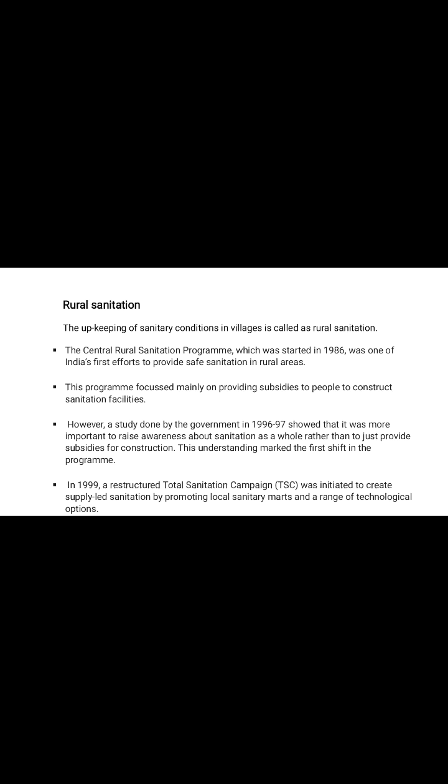In 1999, a restructured Total Sanitation Campaign was initiated to create supply-led sanitation by promoting local sanitary marts and a range of technological options.

The rural sanitation campaign has the following objectives: accelerate sanitation coverage in rural areas, and generate a push from people to get facilities rather than expecting the government to do it, as per demand-led promotion.

Also focus on intensive education and awareness campaigns to ensure that people understand the need for safe sanitation. Also, take the scheme beyond rural households to rural schools and nursery schools.

Emphasis was also placed on promoting good hygiene practices, as well as promoting cost-effective and appropriate technologies, to improve the health and quality of life in rural areas. These are the objectives of the rural sanitation campaign.

The last modification of the scheme happened in 2012. It was restructured and renamed the Nirmal Bharat Abhiyan, with an intent to transform India into a Nirmal Bharat. The scheme's revised target for reaching total sanitation was changed from 2012 to 2022, to accelerate efforts to achieve universal sanitation coverage and put focus on sanitation.

The Prime Minister of India launched the Swachh Bharat Mission on 2nd October 2014. Under the mission, all villages, Gram Panchayats, districts, states, and union territories in India declared themselves open defecation free by 2nd October 2019, on the occasion of the 150th birth anniversary of Mahatma Gandhi, by constructing around 100 million toilets in rural India.

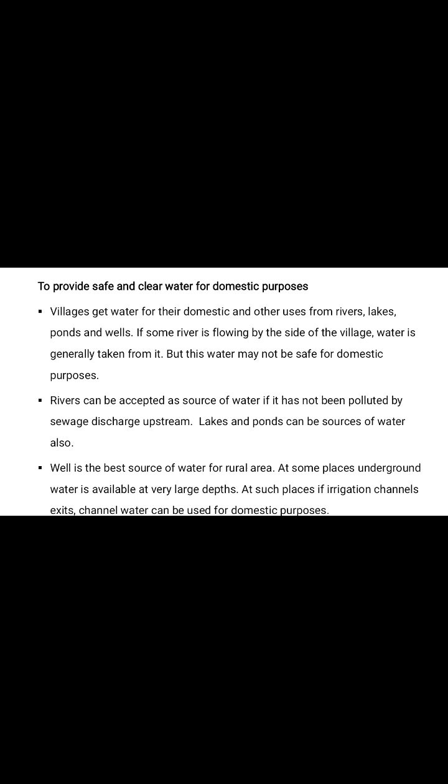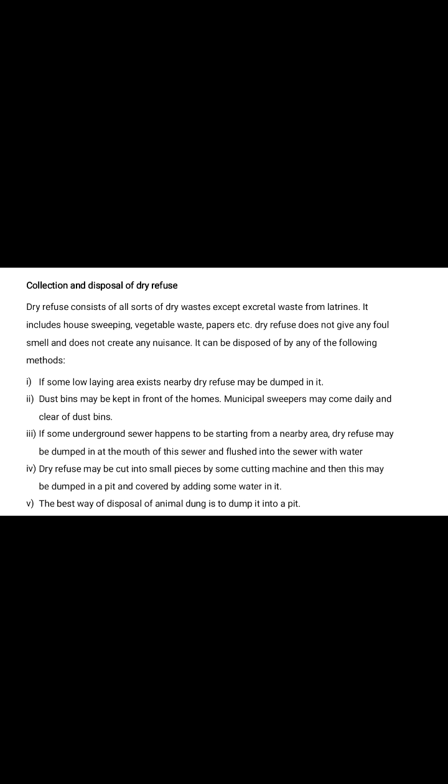The best way of disposal of animal dung is to dump it into a pit. Then third,

A head in rural sanitation is collection and disposal of wastewater. The wastewater consists of used water from bathrooms, kitchens, house washing, washing of clothes, etc. Disposal of such waste may be carried out by any of the following methods.

First, in villages, this wastewater is drained out of homes and may be used to water the trees. Second, in villages, the wastewater drain may be connected with pits in which animal dung and dry refuse is being dumped.

Also, in small towns, surface drains may be made along both edges of the streets, and wastewater drains from homes connected to them. In medium-sized towns, small pits are constructed in front of individual homes or in front of a group of homes.

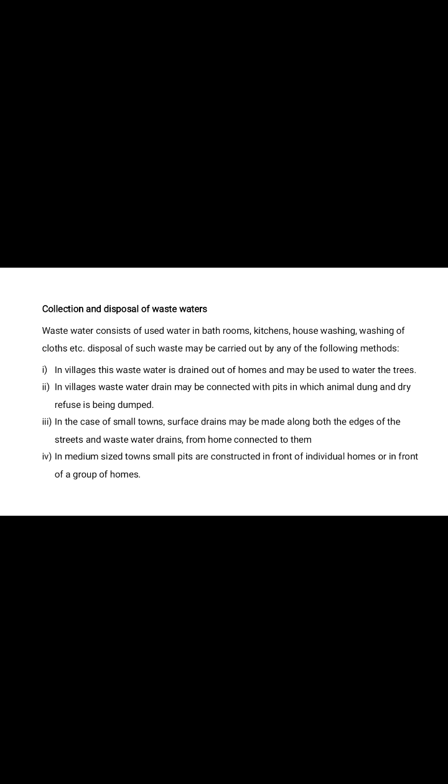The last head in rural sanitation is disposal of excretal waste. There is generally a lot of open land available around villages and small towns. People mostly go out into this open land for defecation, but still latrines are made inside homes for use of ladies and children. In small towns, it is not possible to install a proper system of sewers.

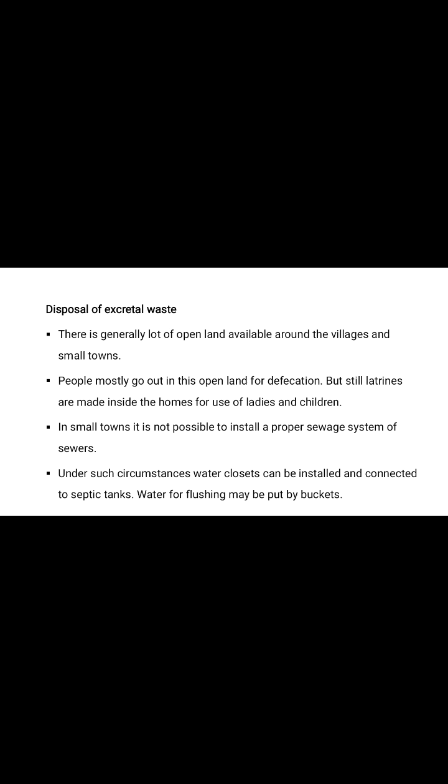Under such circumstances, water closets can be installed and connected to septic tanks. Water for flushing may be poured by buckets.

In the conservancy system, the human excreta is collected in various types of privies, such as toilets, a few of which are pit privy, borehole privy, cesspools, concrete vault privy, dug well privy, chemical toilet, removable receptacle privy, and aqua privy. These are types of privies or toilets generally used in sanitation for disposal of excretal waste.

First, let's study pit privy. This is very economical and requires no operation. The figure shows this type of improved privy in the next slide. It is essentially a pit 1.3 by 1 meter in plan and 1.5 to 2.8 meters deep.

At the top of this pit, the squatting seat is provided in a compartment. The superstructure is of temporary nature. When the pit is filled, it is closed from the top by a 60 cm thick earth layer, and a new pit is excavated by the side of it.

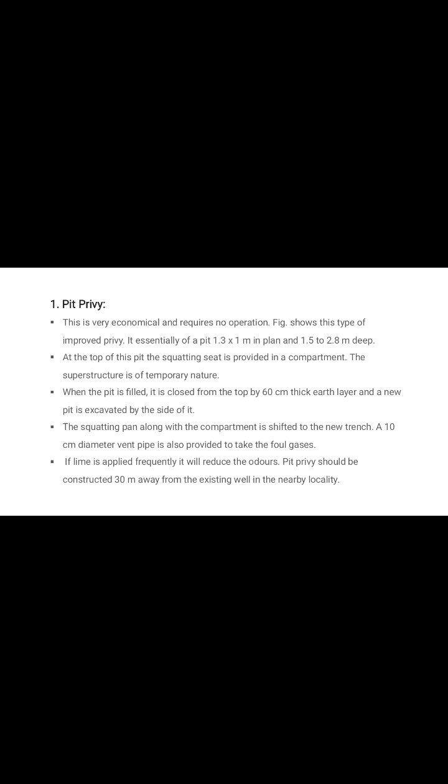The squatting pan along with the compartment is shifted to the new trench. A 10 cm diameter vent pipe is also provided to take off the foul gases. If lime is applied frequently, it will reduce the odors. A pit privy should be constructed 30 meters away from any existing well in the nearby locality.

So this is the figure of pit privy, including roof, ventilating shafts, and squatting seats. This is the sectional elevation, showing steps, doors, ventilating shafts, and sheets. And this is the plan of the pit privy.

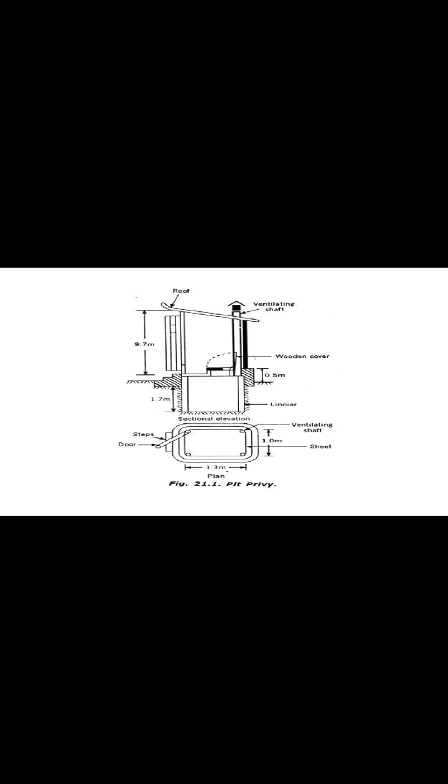Second, borehole privy. It is similar to pit privy; the only difference is in the shape of the pit. It has a long 40 cm diameter hole. The depth of the borehole should be 100 cm less than the groundwater table, so that the excreta may not pollute the groundwater.

The hole should be lined from inside. When the hole is filled up, it is covered by a thick layer of soil, and another hole is dug by the side of it.

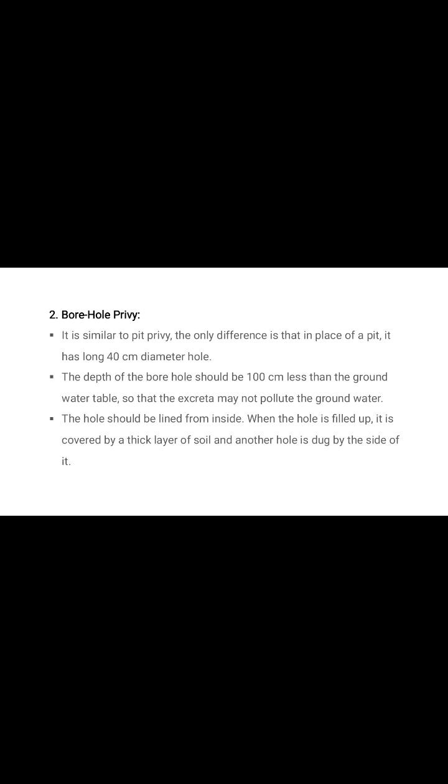The borehole latrine generally consists of a circular hole 30 to 40 cm in diameter, dug vertically into the ground to a depth of 20 feet with the help of special equipment known as an auger. The night soil undergoes purification by anaerobic digestion and is eventually converted into a harmless mass. The effort should be that the depth of the borehole should not reach underground water.

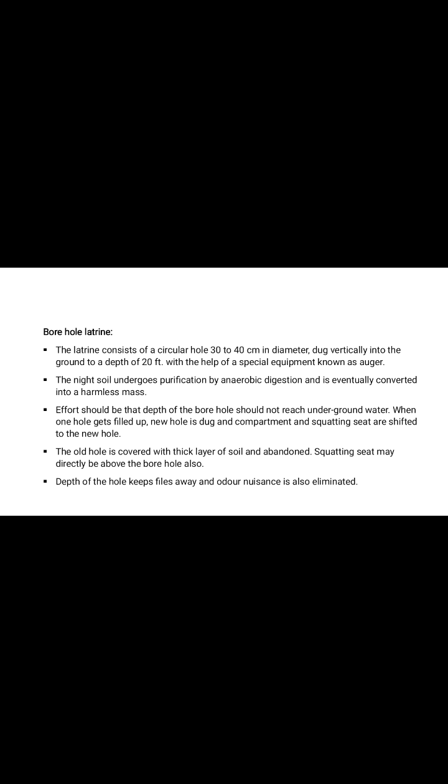When one hole gets filled up, a new hole is dug and the compartment and squatting seat are shifted to the new hole. The old hole is covered with a thick layer of soil and abandoned. A squatting seat may be directly above the borehole. The depth of the hole keeps flies away and odor is also eliminated in the borehole privy.

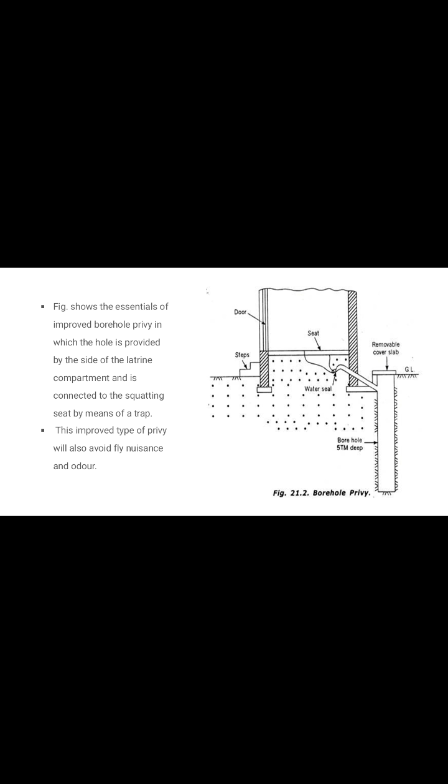This figure shows the essentials of improved borehole construction, where the hole is provided by the side of the latrine compartment and is connected to the squatting seat by means of a trap. This improved type will also avoid flies and odors. This is the borehole privy: squatting seat, door steps, water seal, removable cover slab, and the borehole.

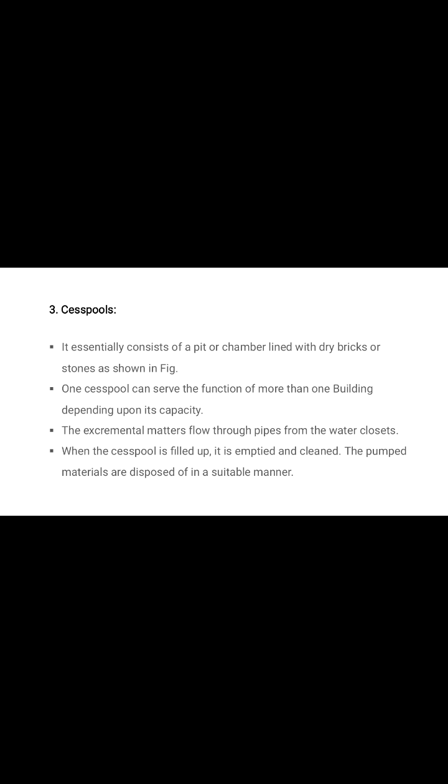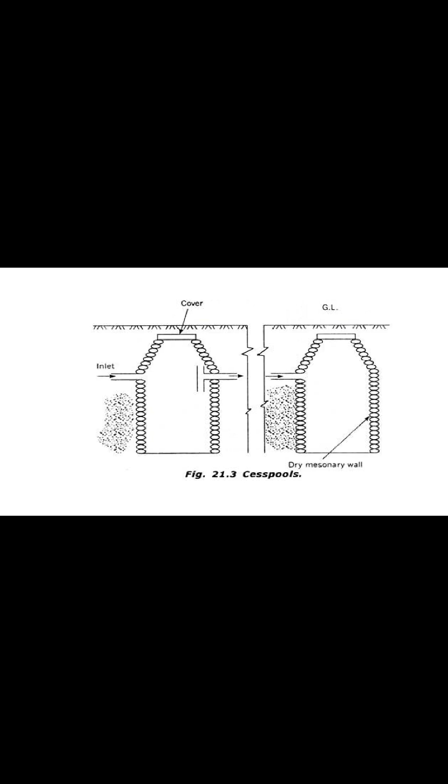Fourth, concrete vault privy. In previous soils, when the water table is very close to the ground surface, it becomes difficult to construct a borehole, pit, or other types of privy, because excreta matter will pollute the groundwater. Under such circumstances, a concrete vault privy is most suitable.

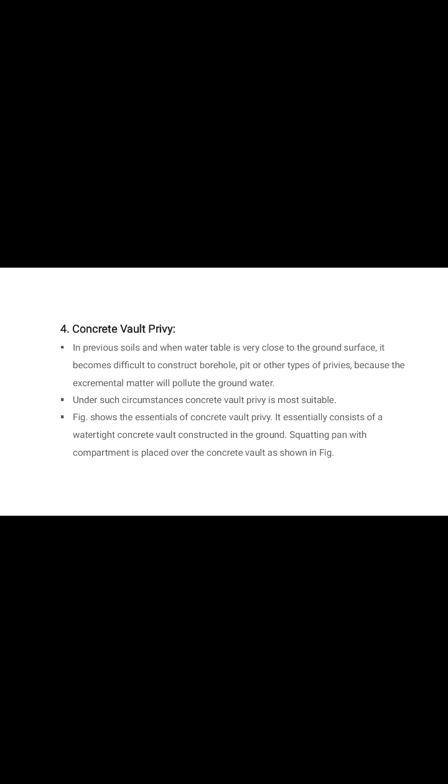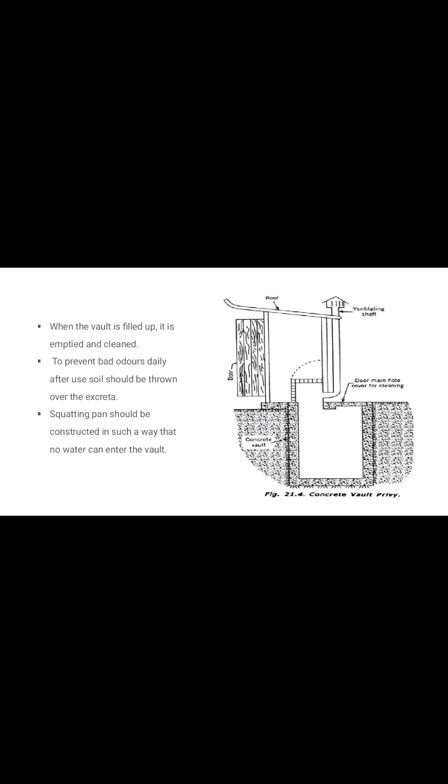The figure shows the essentials of a concrete vault privy. It essentially consists of a watertight concrete vault constructed in the ground. A squatting pan with compartment is placed over the concrete vault as shown. When the vault is filled up, it is emptied and cleaned. To prevent bad odor, soil should be thrown over the excreta daily after use. The squatting pan should be constructed so that no water can enter the vault.

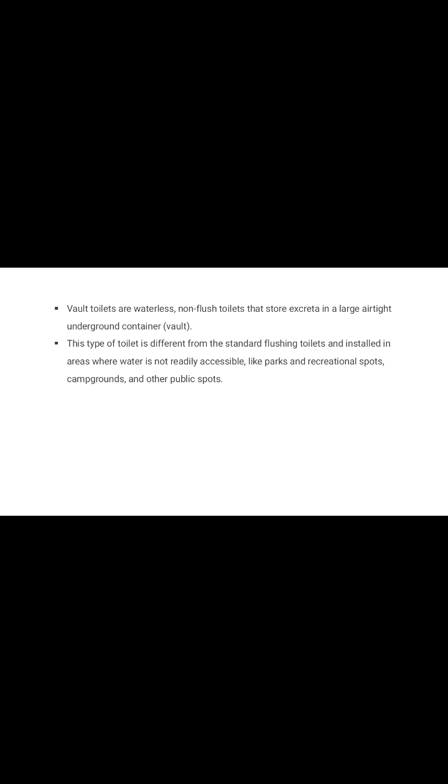Vault toilets are waterless, non-flush toilets that store excreta in a large airtight underground container. This type of toilet is different from standard flushing toilets and is installed in areas where water is not readily accessible, like parks, recreational spots, campgrounds, and other public spots.

Fifth, dugwell privy. It is similar to the borehole privy; the only difference is the diameter of the hole. The dugwell privy is 75 by 75 by 360 centimeters excavated, which is lined with honeycomb brick work to absorb the liquid waste.

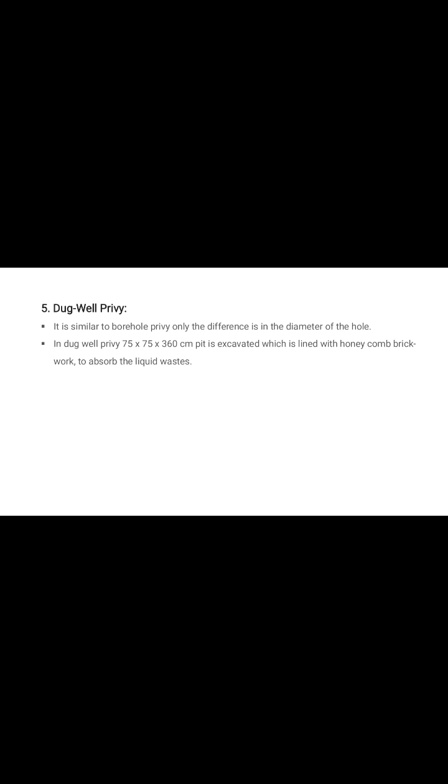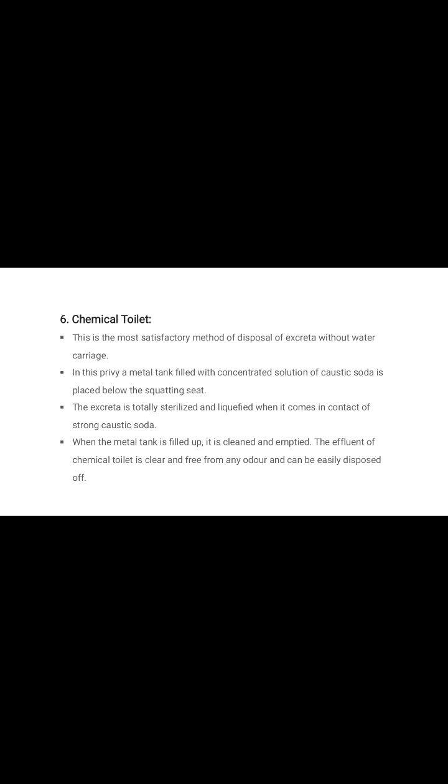Number six, chemical toilet. This is the most satisfactory method of disposal of excreta waste without water carriage. In this, a metal tank filled with concentrated solution of caustic soda is placed below the squatting seat. The excreta is totally sterilized and liquefied when it comes into contact with the strong caustic soda. When the metal tank is filled up, it is cleaned and emptied. The effluent of the chemical toilet is clear and free from any odor and can be easily disposed of.

Number seven, removable receptacle privy. This is a cheap type of privy and is mostly used in Indian towns. It requires the services of a sweeper for its daily cleaning. It essentially consists of metal boxes placed below the squatting seat. The excreta is collected daily from this removable receptacle by the sweeper.

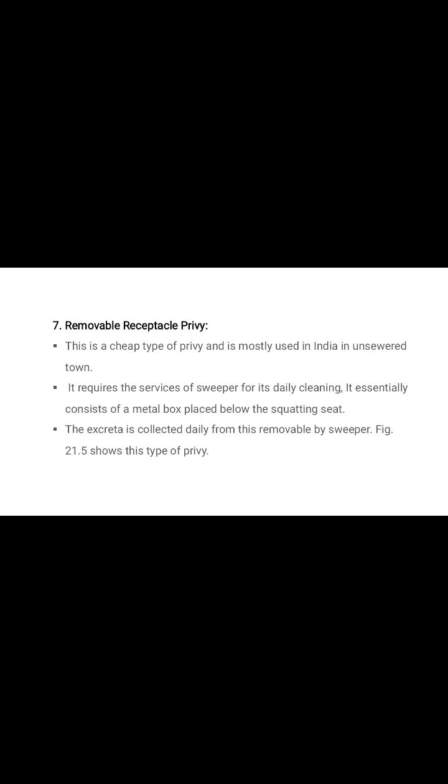This figure shows a removable receptacle privy: metal receptacle container under the squatting seat, masonry wall, hinged metal cover, for removing the metal receptacle container daily by sweepers.

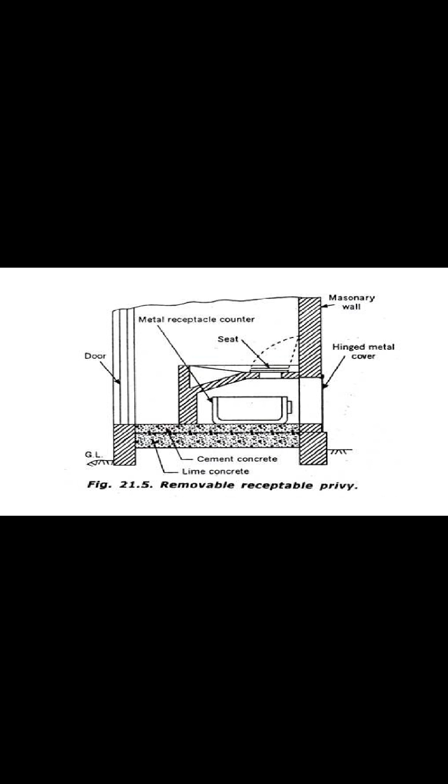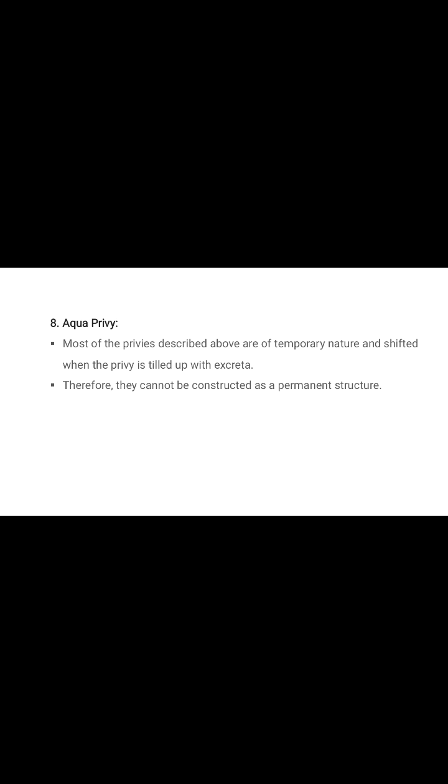And last, aqua privy. Most of the privies described above are of temporary nature and are shifted when the privy is filled up with excreta. Therefore, they cannot be constructed as permanent structures.

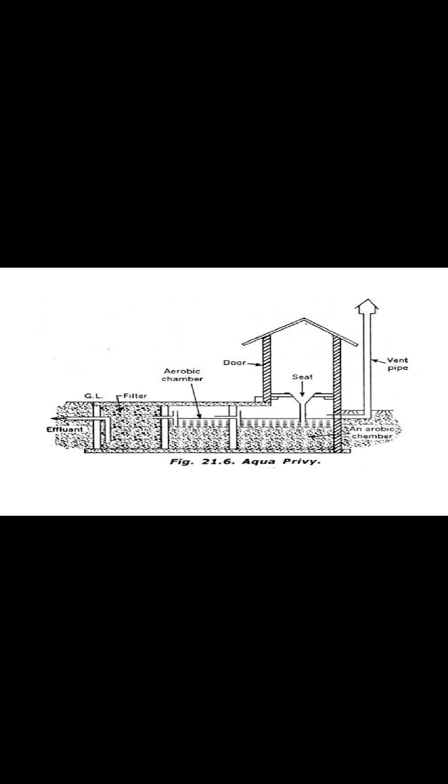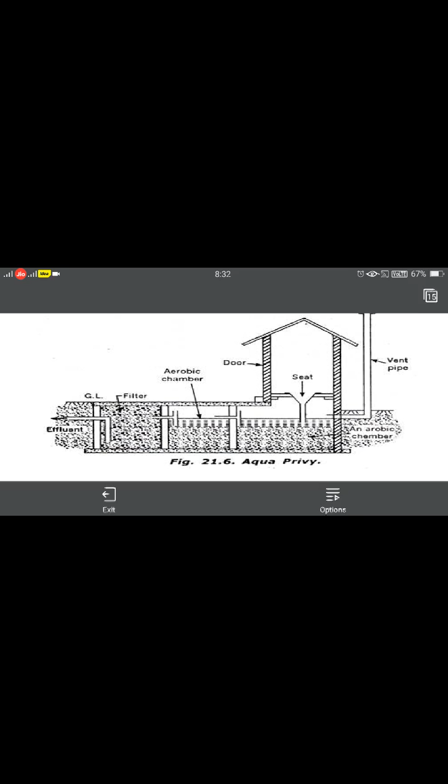This is the aqua privy: under the squatting seat there is an anaerobic chamber, generally like a septic tank. These privies are generally installed over septic tanks, with ventilating pipes provided, and outlets generally through the soil strata. Generally, the anaerobic chambers carry out digestion of the excreta waste, and the water transfers into the soil. Thank you, students.